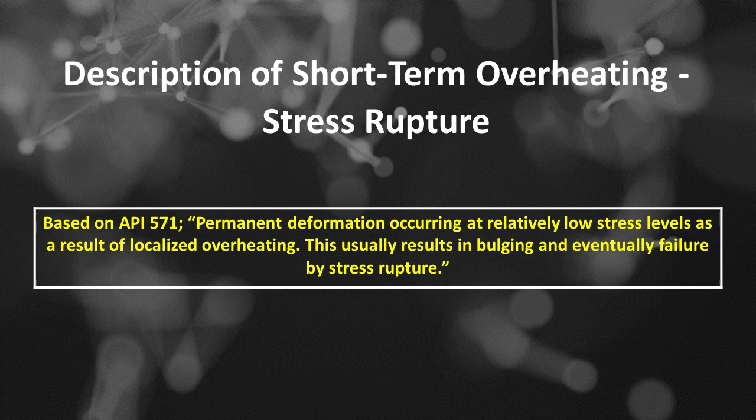Permanent deformation occurs at relatively low stress levels as a result of localized overheating. This usually results in bulging and eventually failure by stress rupture. Short-term overheating leading to stress rupture damage refers to the failure of materials, particularly metals and alloys, due to exposure to elevated temperatures for a relatively brief period while under stress. This phenomenon is particularly significant in applications involving high-temperature environments, such as power plants, chemical processing facilities, and aerospace components.

Characteristics of short-term overheating, stress rupture damage. Number 1 is mechanism. When materials are exposed to temperatures that exceed their design limits, microstructural changes occur. These may include grain growth, phase transformations, or the degradation of mechanical properties.

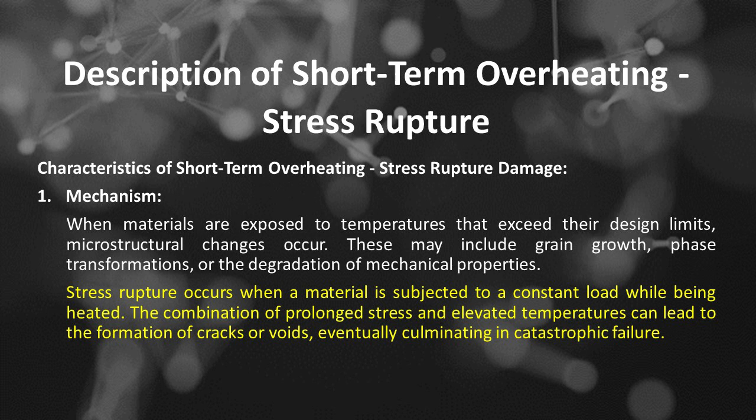Stress rupture occurs when a material is subjected to a constant load while being heated. The combination of prolonged stress and elevated temperatures can lead to the formation of cracks or voids, eventually culminating in catastrophic failure.

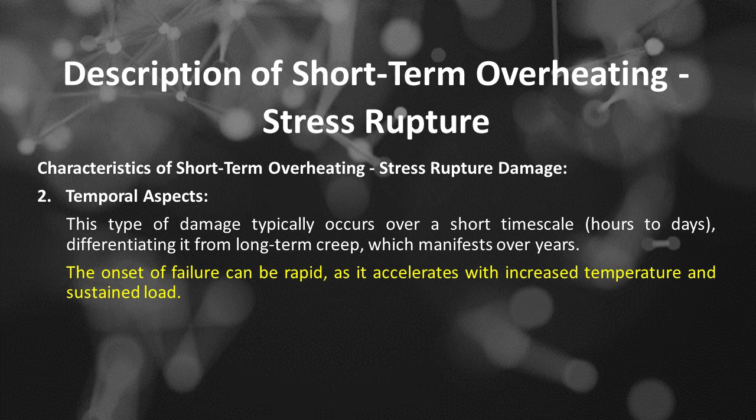Number 2 is temporal aspects. This type of damage typically occurs over a short timescale, hours to days, differentiating it from long-term creep, which manifests over years. The onset of failure can be rapid, as it accelerates with increased temperature and sustained load.

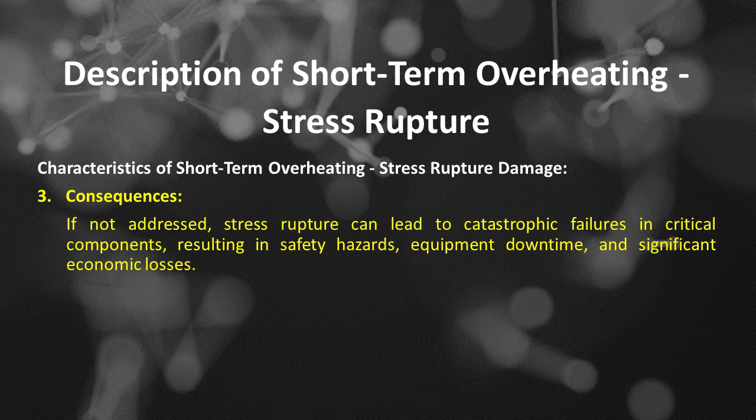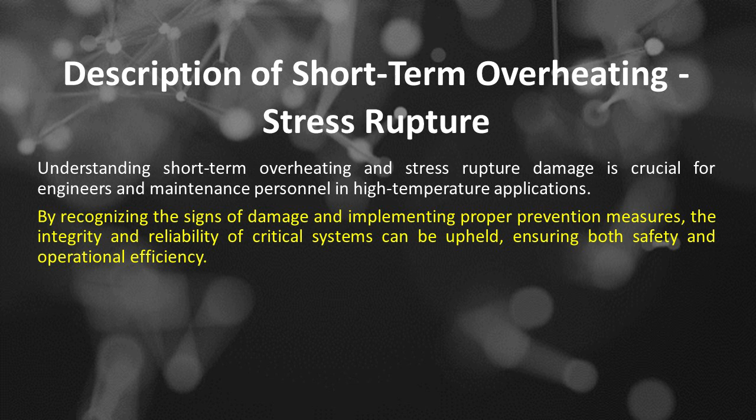Number 3 is consequences. If not addressed, stress rupture can lead to catastrophic failures in critical components, resulting in safety hazards, equipment downtime, and significant economic losses. Understanding short-term overheating and stress rupture damage is crucial for engineers and maintenance personnel in high-temperature applications. By recognizing the signs of damage and implementing proper prevention measures, the integrity and reliability of critical systems can be upheld, ensuring both safety and operational efficiency.

Short-term overheating, stress rupture damage mechanisms affected materials based on API 571. All fired heater tube materials and common materials of construction. Short-term overheating can lead to stress rupture damage, particularly in materials subjected to high temperatures and mechanical loads. This phenomenon is especially critical in high-temperature applications, such as power generation, aerospace, and petrochemical industries.

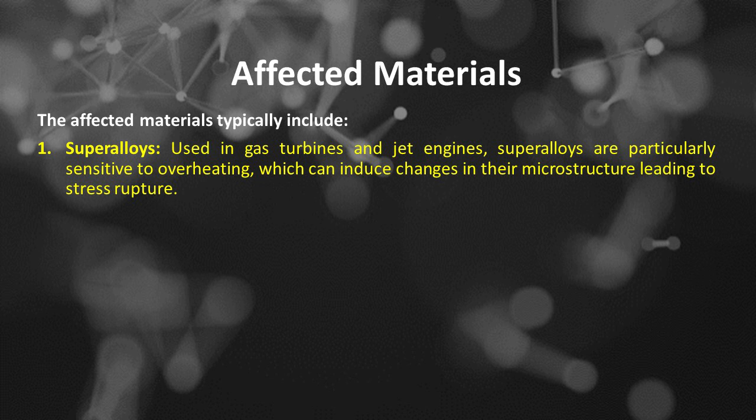The affected materials typically include: Number 1 is superalloys. Used in gas turbines and jet engines, superalloys are particularly sensitive to overheating, which can induce changes in their microstructure leading to stress rupture. Number 2 is steel alloys.

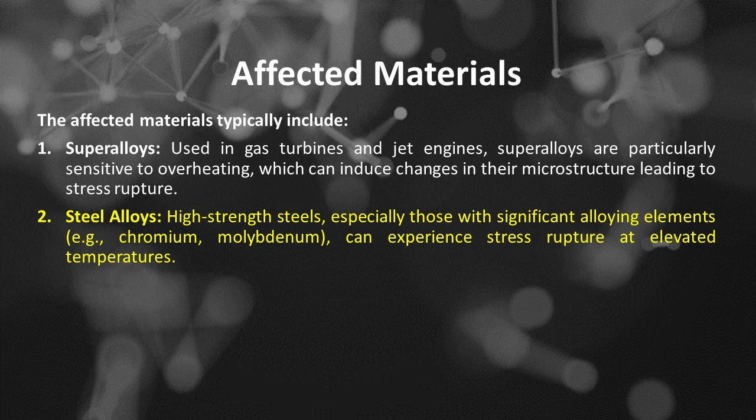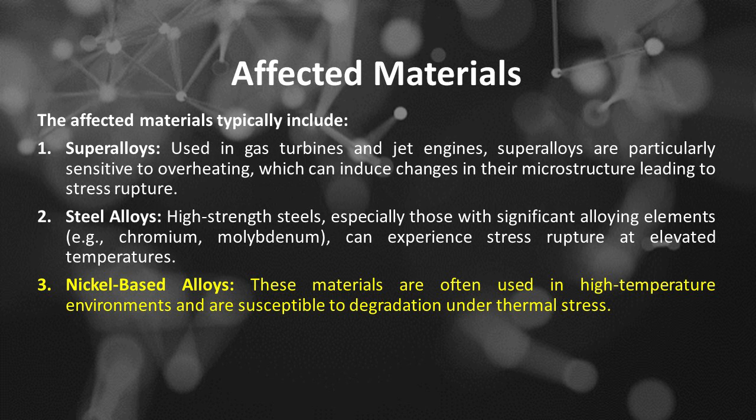High-strength steels, especially those with significant alloying elements, e.g., chromium, molybdenum, can experience stress rupture at elevated temperatures. Number 3 is nickel-based alloys. These materials are often used in high-temperature environments and are susceptible to degradation under thermal stress.

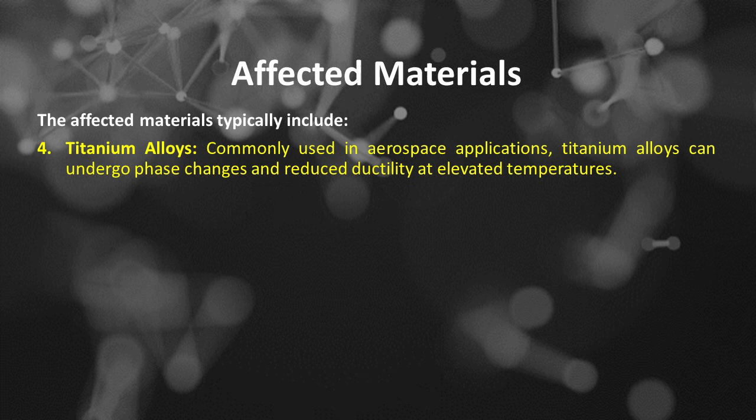Number 4 is titanium alloys. Commonly used in aerospace applications, titanium alloys can undergo phase changes and reduced ductility at elevated temperatures. Number 5 is ceramics. While ceramics may not rupture in the traditional sense, they can degrade or fail under thermal

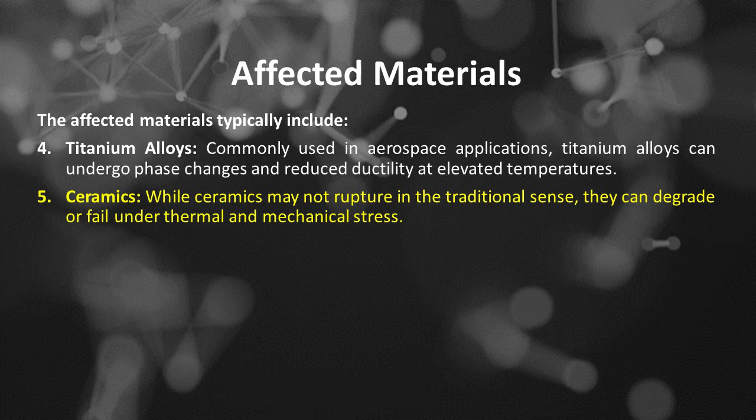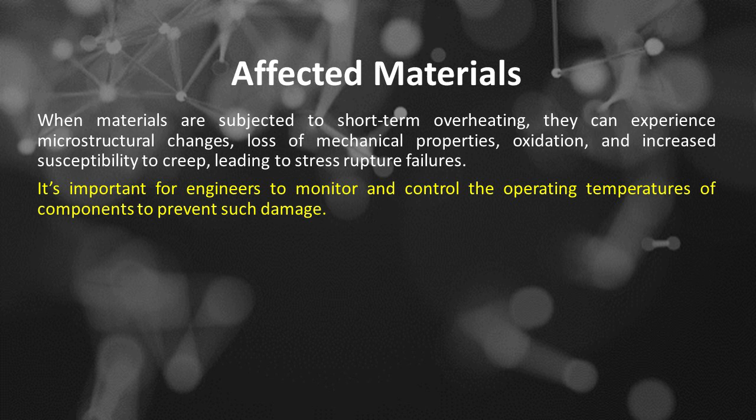and mechanical stress. Number 6 is composite materials. Polymer matrix composites, or PMCs, can be affected by overheating, leading to matrix degradation and interlaminar failure. When materials are subjected to short-term overheating, they can experience microstructural changes, loss of mechanical properties, oxidation, and increased susceptibility to creep, leading to stress rupture failures. It's important for engineers to monitor and control the operating temperatures of components to prevent such damage.

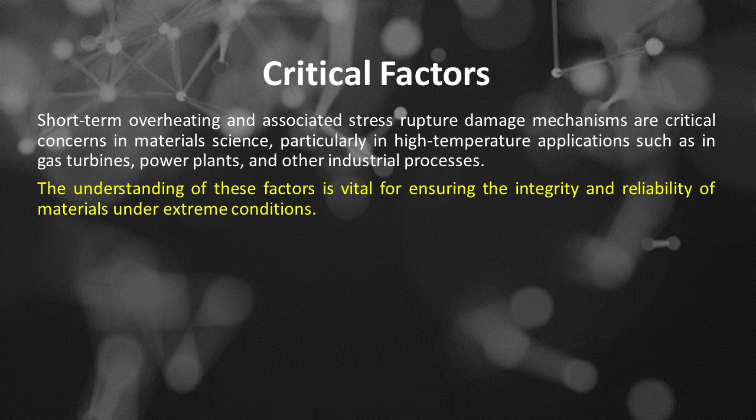Critical factors. Short-term overheating and associated stress rupture damage mechanisms are critical concerns in materials science, particularly in high-temperature applications such as in gas turbines, power plants, and other industrial processes. The understanding of these factors is vital for ensuring the integrity and reliability of materials under extreme conditions. Here are the critical factors influencing short-term overheating and stress rupture.

Number 1 is temperature exposure. High temperatures can significantly affect the mechanical properties of materials, leading to softening and decreased strength. Exceeding the material's design temperature can accelerate damage mechanisms. Number 2 is time at elevated temperature. The duration of exposure to elevated temperatures influences the extent of material degradation. Even short-term exposure can cause significant changes in microstructure and mechanical properties.

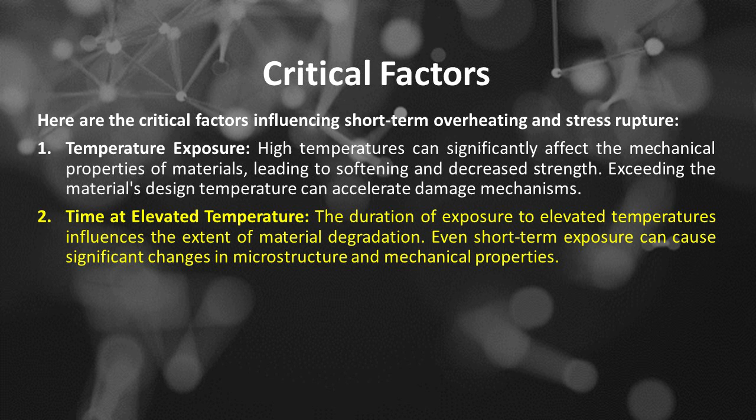Number 3 is material composition. The specific alloying elements and phase structures in a material influence its resistance to overheating and stress rupture. Materials with higher creep resistance, such as certain nickel-based superalloys, perform better under severe conditions.

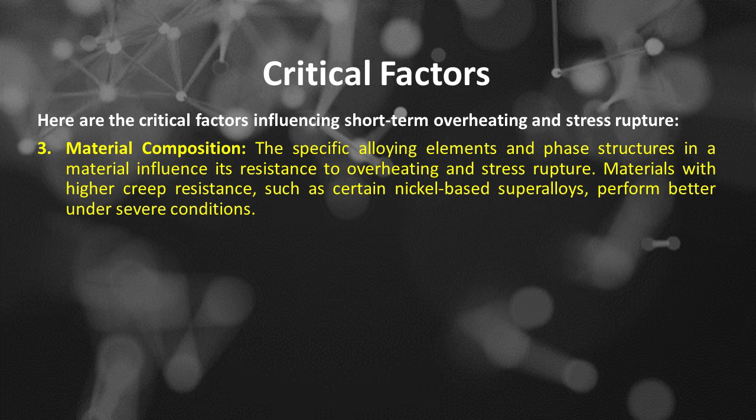The first of material composition is creep resistance. Materials exhibiting good creep resistance will generally perform better under high temperature and stress conditions. Understanding the material's creep behavior is crucial in assessing its susceptibility to stress rupture.

The second of material composition is alloy composition. The specific alloying elements and their concentrations can affect the material's resistance to thermal fatigue and stress rupture. Elements that promote solid solution strengthening or cohesive strength at high temperatures can enhance performance.

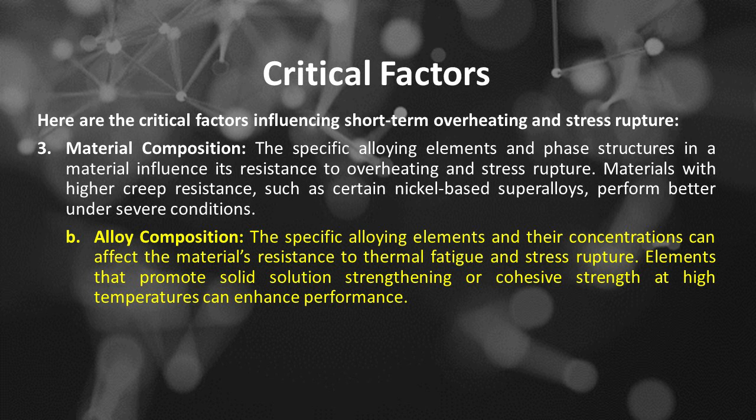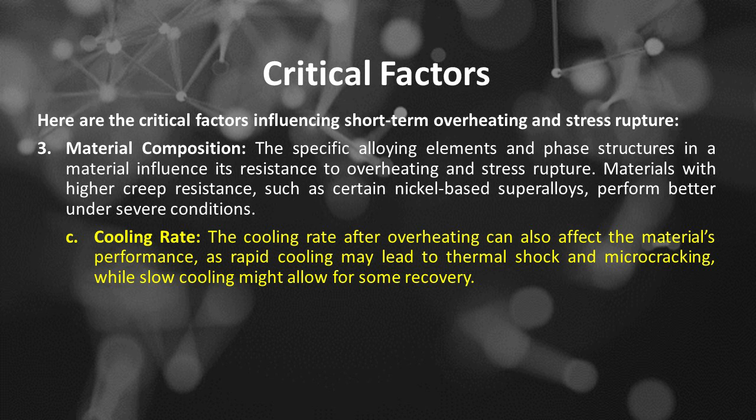The third is cooling rate. The cooling rate after overheating can also affect the material's performance, as rapid cooling may lead to thermal shock and microcracking, while slow cooling might allow for some recovery.

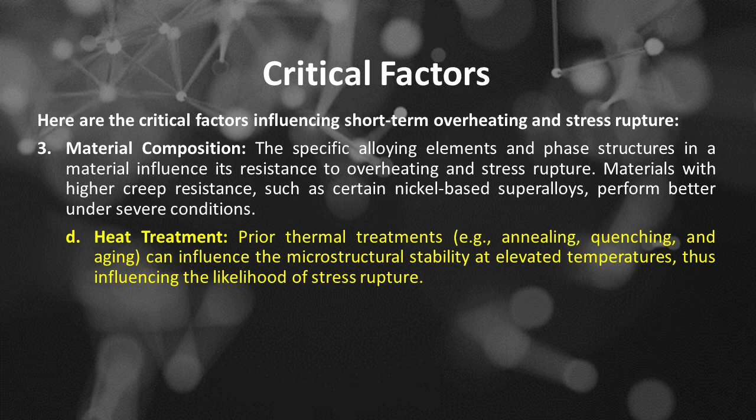The fourth is heat treatment. Prior thermal treatments, e.g., annealing, quenching, and aging, can influence the microstructural stability at elevated temperatures, thus influencing the likelihood of stress rupture.

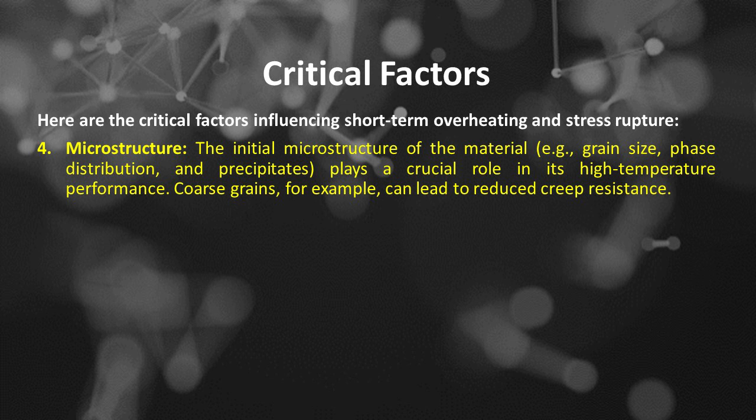Number 4 is microstructure. The initial microstructure of the material, such as grain size, phase distribution, and precipitates, plays a crucial role in its high-temperature performance. Coarse grains, for example, can lead to reduced creep resistance.

Number 5 is stress state. The applied load and type of stress, tensile, compressive, shear, can affect the rupture behavior. High tensile stresses can exacerbate the effects of thermal damage.

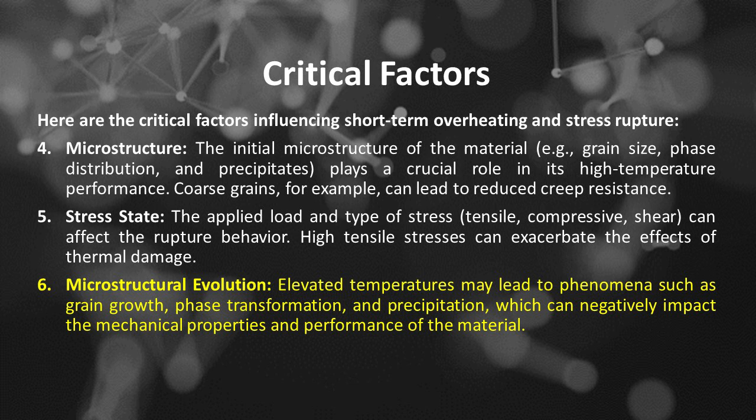Number 6 is microstructural evolution. Elevated temperatures may lead to phenomena such as grain growth, phase transformation, and precipitation, which can negatively impact the mechanical properties and performance of the material.

Number 7 is oxidation and corrosion. At high temperatures, materials are more susceptible to oxidation and other forms of deterioration, which can further degrade material properties and lead to premature failure.

Number 8 is prior service history. The material's previous exposure to stress and temperature cycles can affect its current behavior under overheating conditions, including the development of residual stresses or damage.

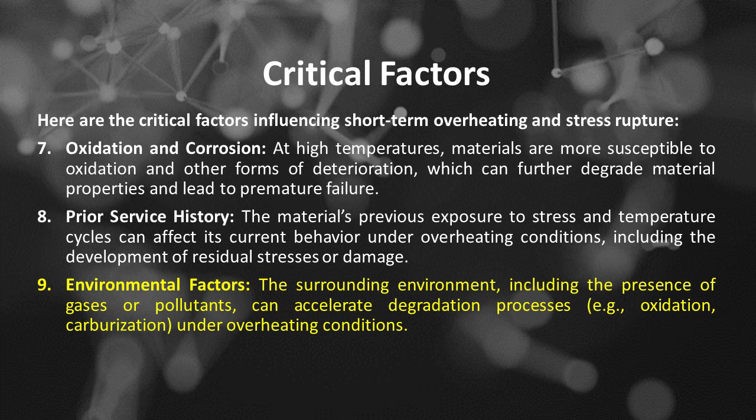Number 9 is environmental factors. The surrounding environment, including the presence of gases or pollutants, can accelerate degradation processes, e.g., oxidation, carburization, under overheating conditions.

Number 10 is load history. The history of loading, including any previous cycles of loading and unloading, can introduce residual stresses which may promote stress rupture under thermal conditions. Number 11 is fatigue.

Previous fatigue damage can lead to the formation of microcracks that are more prone to grow under conditions of short-term overheating and sustained stress. Number 12 is presence of voids or defects.

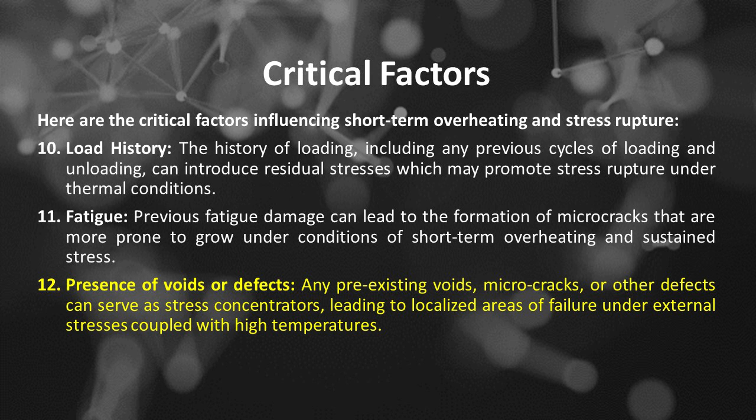Any pre-existing voids, microcracks, or other defects can serve as stress concentrators, leading to localized areas of failure under external stresses coupled with high temperatures.

In summary, short-term overheating and stress rupture mechanisms are influenced by a combination of thermal, mechanical, material, and environmental factors. Understanding these critical elements is necessary for predicting material behavior and designing components that can withstand high-temperature operations safely.

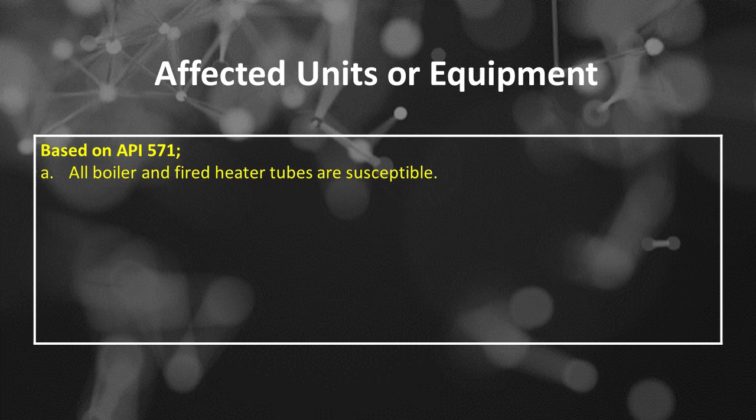Affected units or equipment based on API 571. The first is all boiler and fired heater tubes are susceptible.

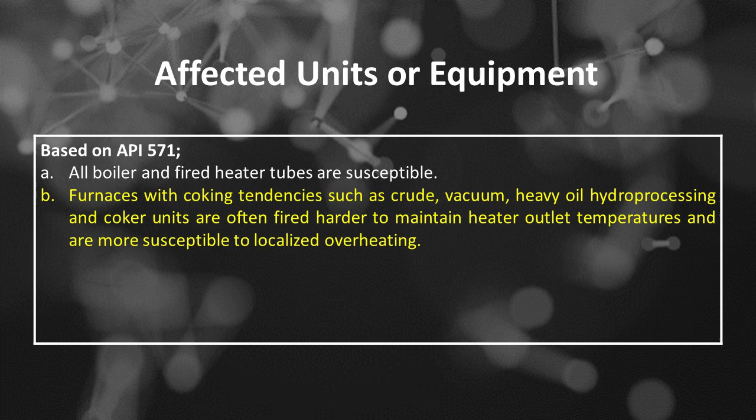The second is furnaces with coking tendencies such as crude, vacuum, heavy oil hydroprocessing and coker units are often fired harder to maintain heater outlet temperatures and are more susceptible to localized overheating.

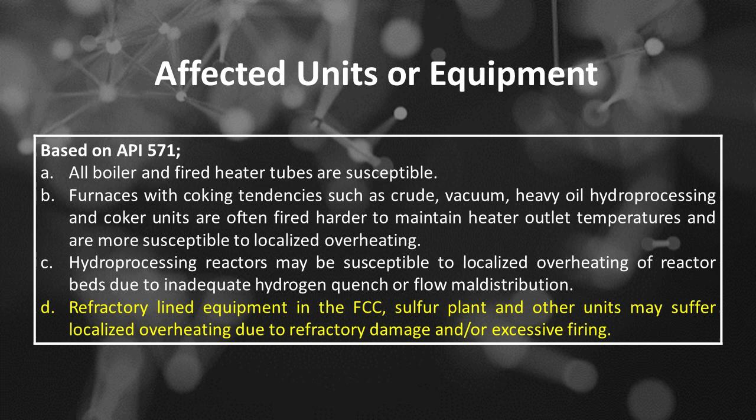The third is hydroprocessing reactors may be susceptible to localized overheating of reactor beds due to inadequate hydrogen quench or flow maldistribution. The fourth is refractory lined equipment in the FCC, sulfur plant and other units may suffer localized overheating due to refractory damage and/or excessive firing.

Short-term overheating, stress rupture is a damage mechanism that occurs when a material is subjected to high temperatures and stresses, causing the material to rupture. The affected units or equipment of this damage mechanism are typically those that are exposed to high-temperature environments, such as...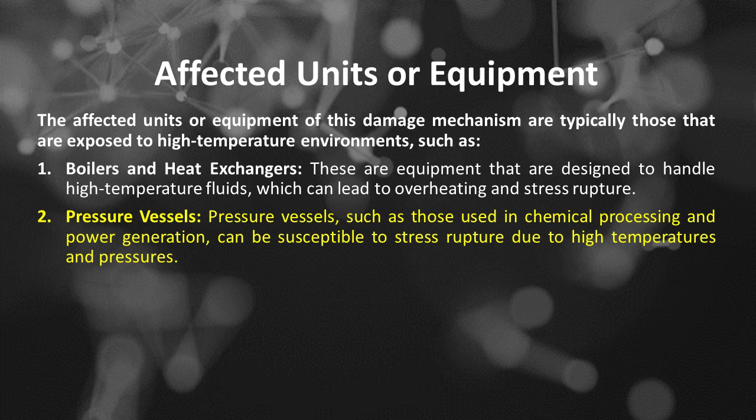Number 2 is pressure vessels. Pressure vessels, such as those used in chemical processing and power generation, can be susceptible to stress rupture due to high temperatures and pressures. Number 3 is piping systems.

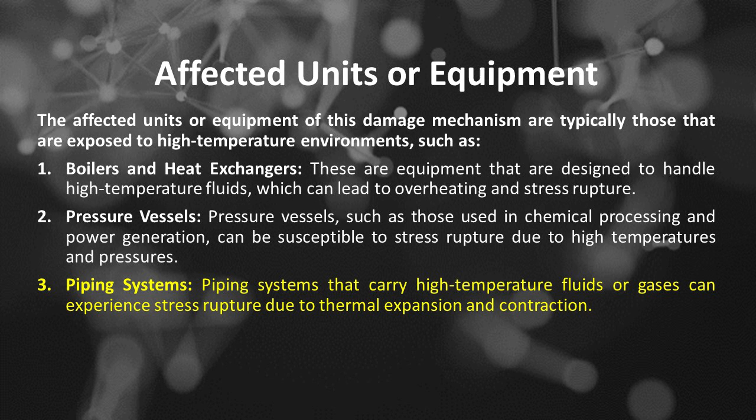Piping systems that carry high-temperature fluids or gases can experience stress rupture due to thermal expansion and contraction. Number 4 is turbines and generators. These machines are designed to operate at high temperatures and can be prone to stress rupture if not properly maintained...

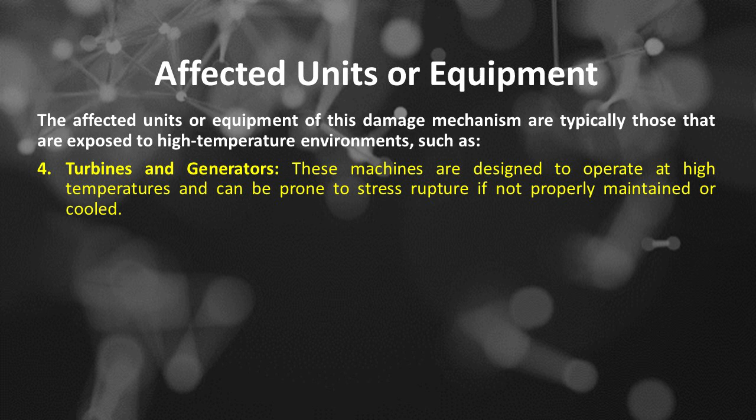or cooled. Number 5 is heat transfer equipment. Equipment such as heat exchangers, condensers, and evaporators can experience stress rupture due to high temperatures and pressure differentials.

Number 6 is cooling systems. Cooling systems, such as cooling towers and heat exchangers, can experience stress rupture if not properly designed or maintained.

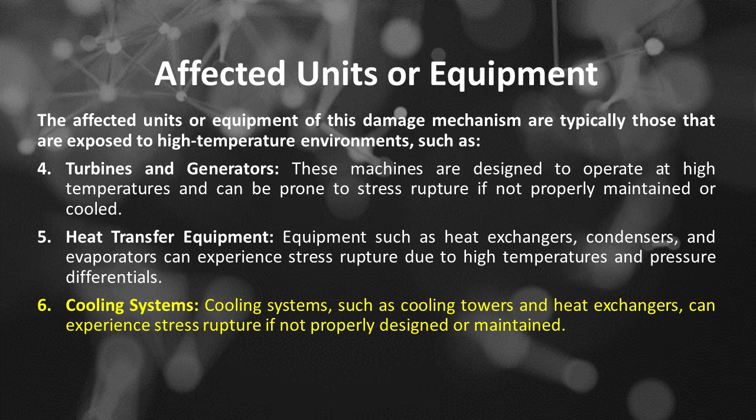Number 7 is refrigeration equipment. Refrigeration equipment, such as compressors and condensers, can experience stress rupture due to high pressures and temperatures.

In general, any equipment or system that is exposed to high temperatures, pressures, or stresses can be susceptible to short-term overheating, stress rupture damage. Appearance or morphology of damage based on API 571.

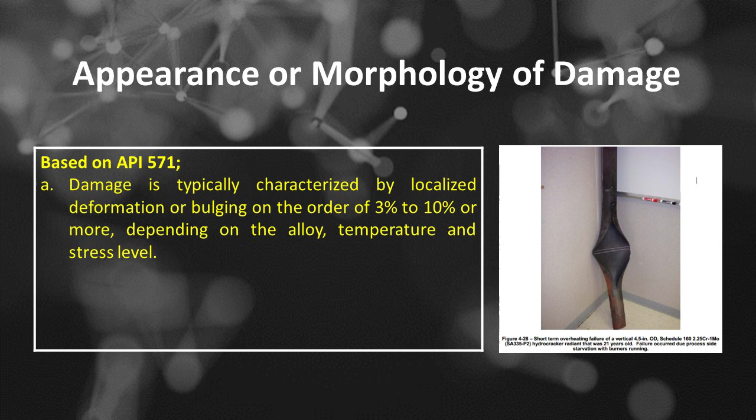The first is damage is typically characterized by localized deformation or bulging on the order of 3% to 10% or more, depending on the alloy, temperature and stress level.

The second is ruptures are characterized by open fish mouth failures and are usually accompanied by thinning at the fracture surface, see Figure 4-28 to 4-30.

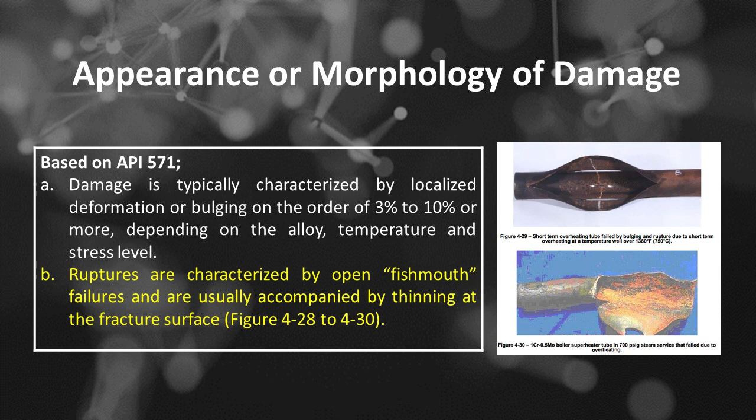The appearance or morphology of damage due to short-term overheating and stress rupture in materials, especially in metals and alloys, is characterized by several distinct features.

Here are the key aspects of the appearance associated with this damage mechanism. Number 1 is cracking. One of the most prominent features is the formation of cracks. These can appear as brittle fractures, often with a characteristic intergranular or transgranular appearance, depending on the material and conditions. The cracks typically initiate at regions of high stress concentration or microstructural defects.

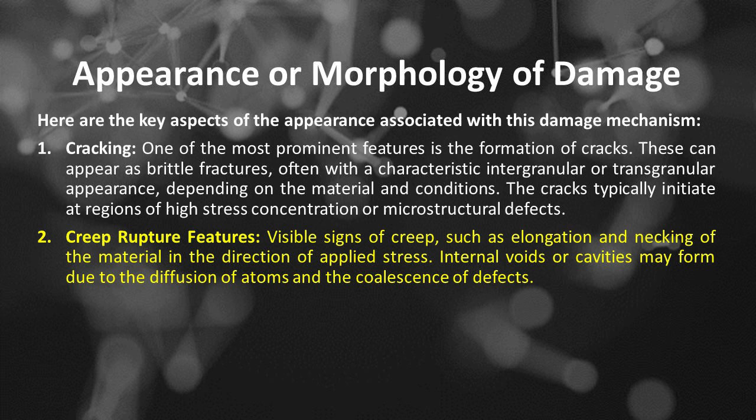Number 2 is creep rupture features. Visible signs of creep, such as elongation and necking of the material in the direction of applied stress. Internal voids or cavities may form due to the diffusion of atoms and the coalescence of defects.

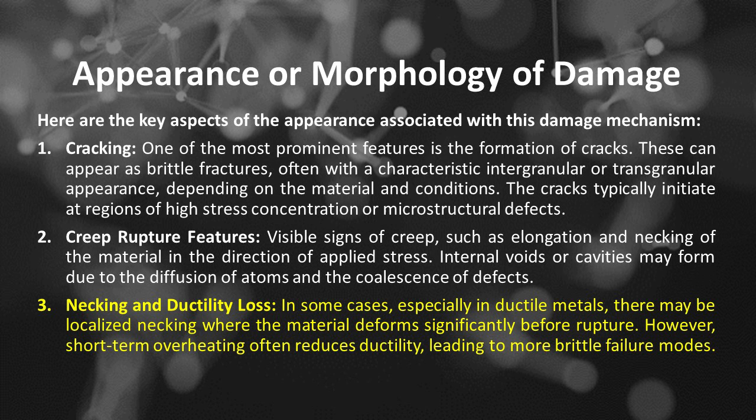Number 3 is necking and ductility loss. In some cases, especially in ductile metals, there may be localized necking where the material deforms significantly before rupture. However, short-term overheating often reduces ductility, leading to more brittle failure modes.

Number 4 is discoloration. Overheating can lead to changes in color on the surface of the material due to oxidation or changes in microstructure. This can include blue or golden hues due to heat tint.

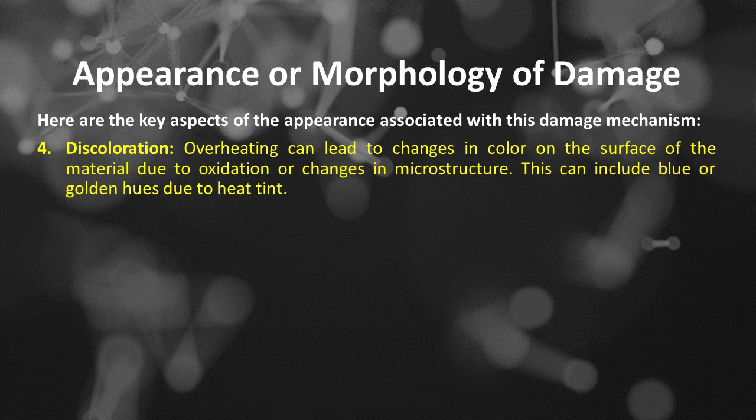Number 5 is grain growth and coarsening. Excessive heat can cause grain growth, which can be visible as larger grains in the microstructure when examined under a microscope. This can reduce the material strength and alter its mechanical properties.

Number 6 is oxide layers or scale formation. On the surface, there may be the formation of oxide layers due to prolonged exposure to elevated temperatures. These scales may vary in thickness and composition, affecting the material's fatigue life and corrosion resistance.

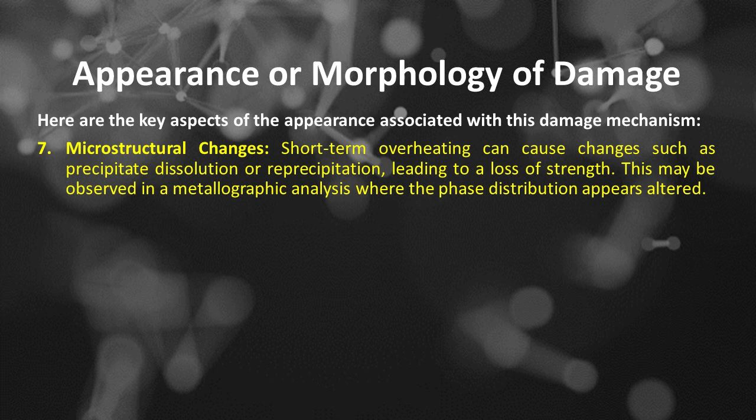Number 7 is microstructural changes. Short-term overheating can cause changes such as precipitate dissolution or reprecipitation, leading to a loss of strength. This may be observed in a metallographic analysis where the phase distribution appears altered. Number 8 is intergranular damage.

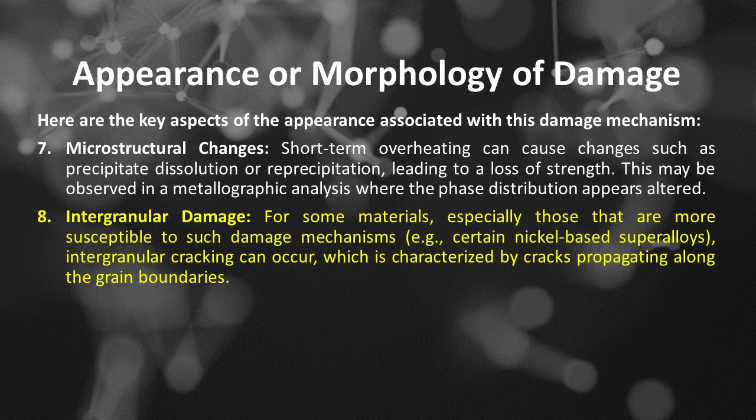For some materials, especially those that are more susceptible to such damage mechanisms, e.g., certain nickel-based superalloys, intergranular cracking can occur, which is characterized by cracks propagating along the grain boundaries.

Number 9 is fracture surface. The fracture surface may display features typical of stress rupture, including a fibrous appearance or a more brittle, granular texture depending on the loading conditions and material properties.

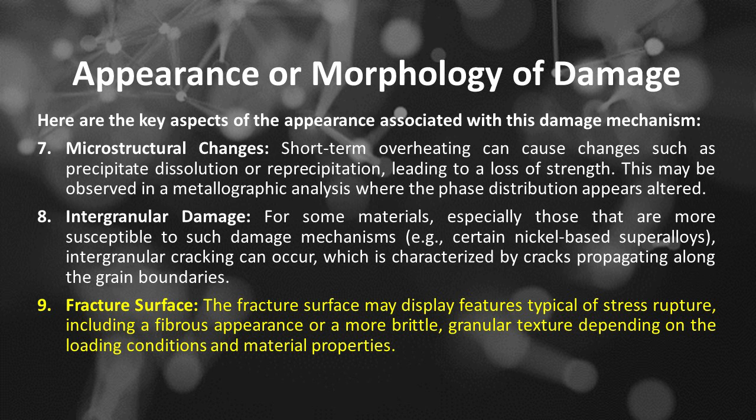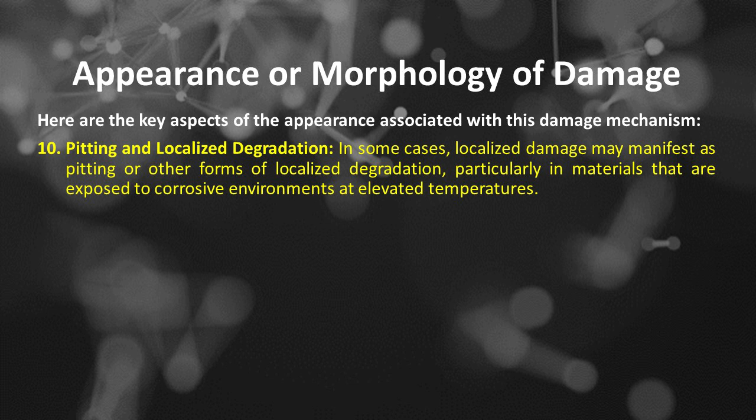Number 10 is pitting and localized degradation. In some cases, localized damage may manifest as pitting or other forms of localized degradation, particularly in materials that are exposed to corrosive environments at elevated temperatures.

Understanding these morphological changes is essential for diagnosing and assessing the integrity of materials subjected to thermal and mechanical stresses, especially in high-temperature applications such as turbines, pressure vessels, and other critical infrastructure.

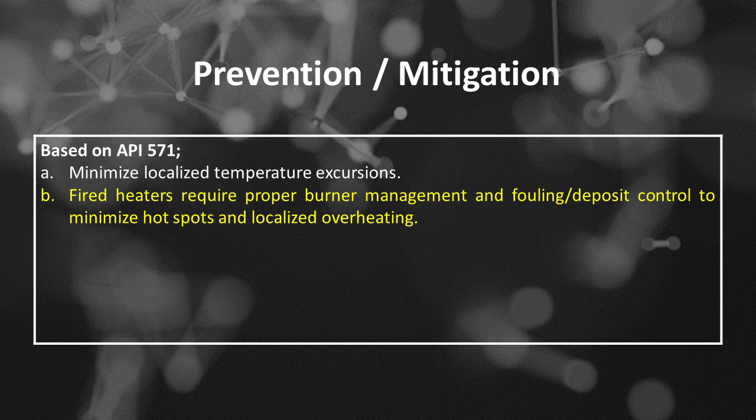Prevention and mitigation based on API 571. The first is minimize localized temperature excursions. The second is fired heaters require proper burner management and fouling/deposit control to minimize hot spots and localized overheating. The third is utilize burners which produce a more diffuse flame pattern.

The fourth is in hydroprocessing equipment, install and maintain bed thermocouples in reactors and minimize the likelihood of hot spots through proper design and operation. The fifth is maintain refractory in serviceable condition in refractory-lined equipment.

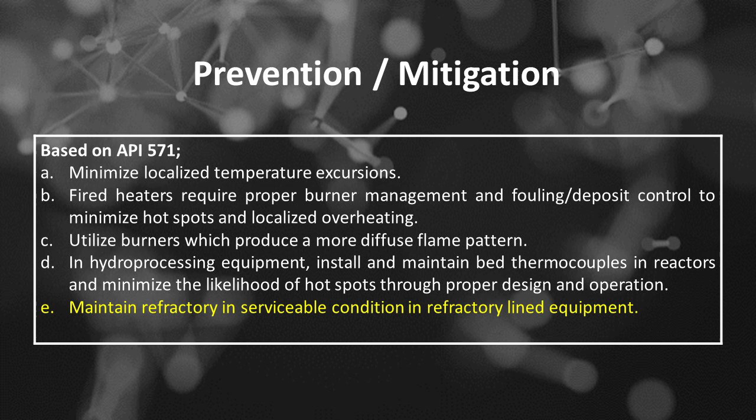Short-term overheating and subsequent stress rupture damage in materials, particularly in high-temperature applications, can lead to significant failures in engineering components. To prevent or mitigate these issues, several strategies can be employed.

Number 1 is material selection. The first of material selection to be considered is use of high-temperature materials. Select materials that have high-temperature resistance and good creep properties for applications that operate in elevated temperatures.

The second of material selection to be considered is alloying. Consider using alloys that are designed to withstand higher temperatures and resist oxidation and corrosion, specifically designed for high-temperature environments, such as nickel-based superalloys, can be more resilient.

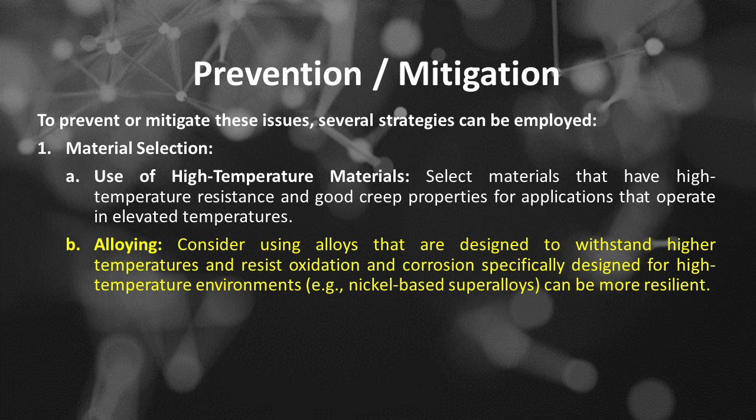Number 2 is design considerations. The first of design considerations to be considered is design for thermal loads. Ensure that the design can accommodate thermal expansion and contraction. This includes proper supports and clearances.

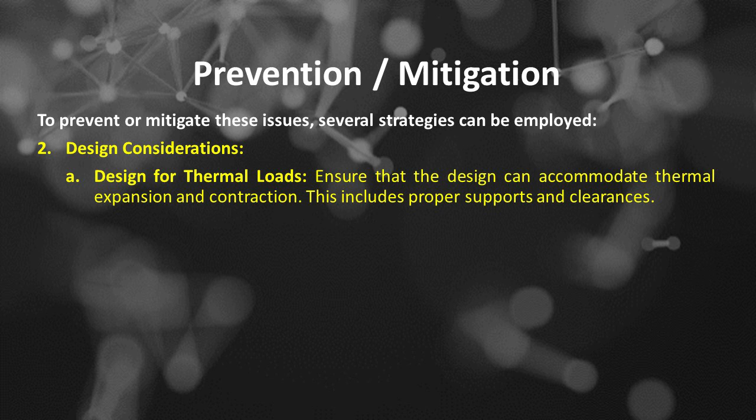The second of design considerations to be considered is stress distribution. Design components to minimize stress concentrations which can exacerbate damage from overheating.

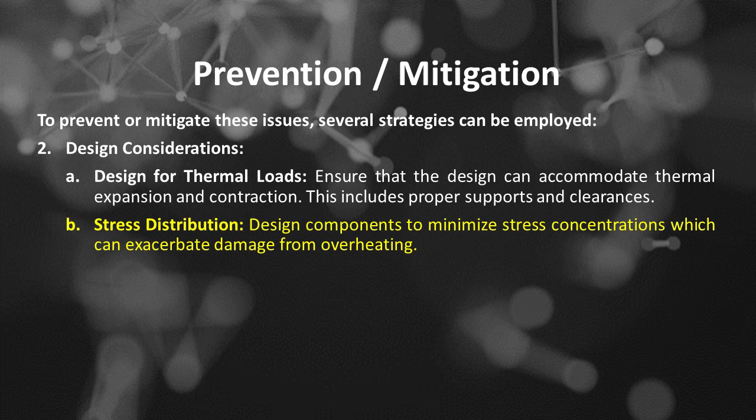Number 3 is thermal management. The first of thermal management to be considered is control operating temperatures through active cooling systems, heat sinks, or insulation to prevent overheating. Insulation: use proper thermal insulation to prevent heat loss and ensure that components do not inadvertently overheat due to external heat sources.

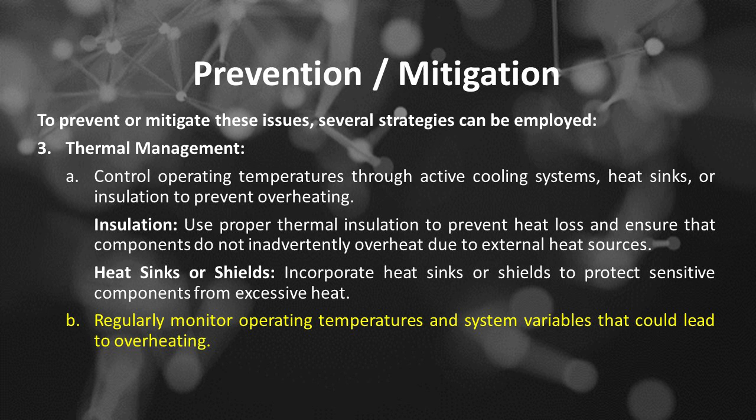Heat sinks or shields: incorporate heat sinks or shields to protect sensitive components from excessive heat. The second of thermal management to be considered is regularly monitor operating temperatures and system variables that could lead to overheating. Number 4 is loading conditions.

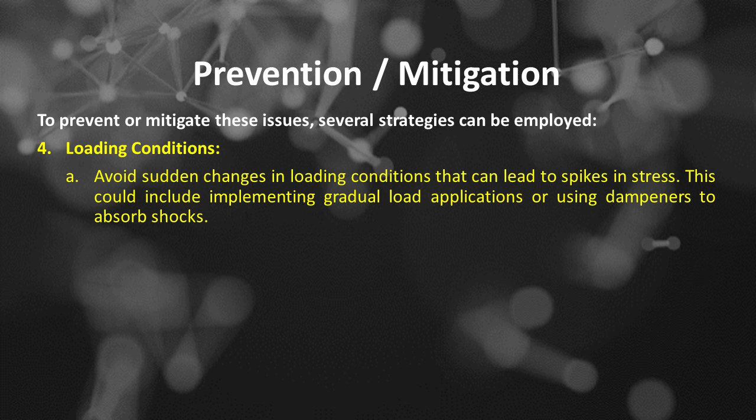Avoid sudden changes in loading conditions that can lead to spikes in stress. This could include implementing gradual load applications or using dampeners to absorb shocks. Number 5 is inspection and maintenance.

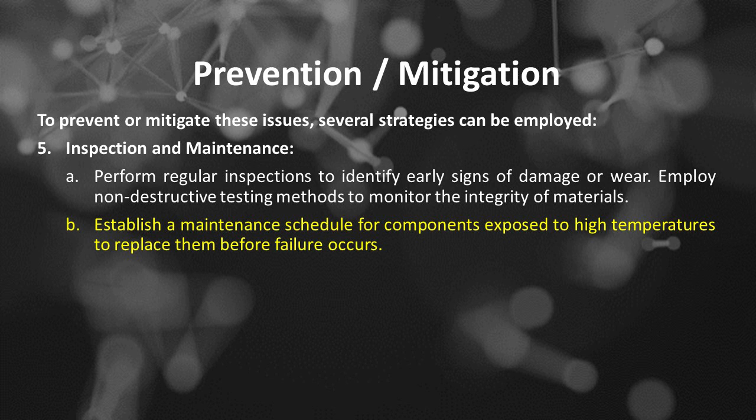The first is to perform regular inspections to identify early signs of damage or wear, and employ non-destructive testing methods to monitor the integrity of materials. The second is to establish a maintenance schedule for components exposed to high temperatures, to replace them before failure occurs.

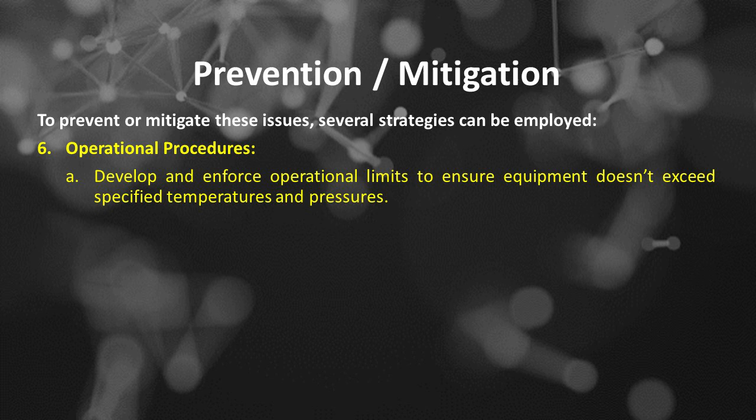Number 6 is operational procedures. The first is to develop and enforce operational limits to ensure equipment doesn't exceed specified temperatures and pressures. The second is to train operators to recognize conditions that lead to overheating and how to respond effectively.

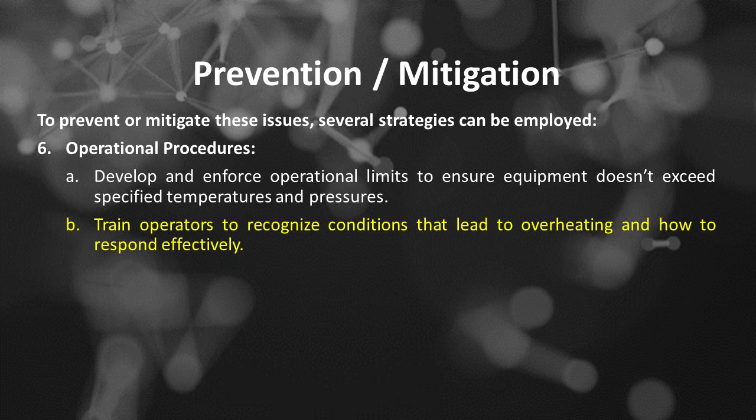Number 7 is protective coatings. Use thermal barrier coatings or oxidation-resistant coatings that can help protect the underlying material from high temperatures.

Number 8 is stress relief techniques. Utilize stress relief heat treatments, if applicable, to reduce residual stresses in components before they are placed in service. The following stress relief treatments are commonly implemented.

The first is post-weld heat treatment. If welding is involved, apply post-weld heat treatment that can relieve stress and reduce the risk of rupture. The second is annealing. For materials that may have been subjected to high-stress conditions, an annealing process may help relieve internal stresses. Number 9 is redundancy.

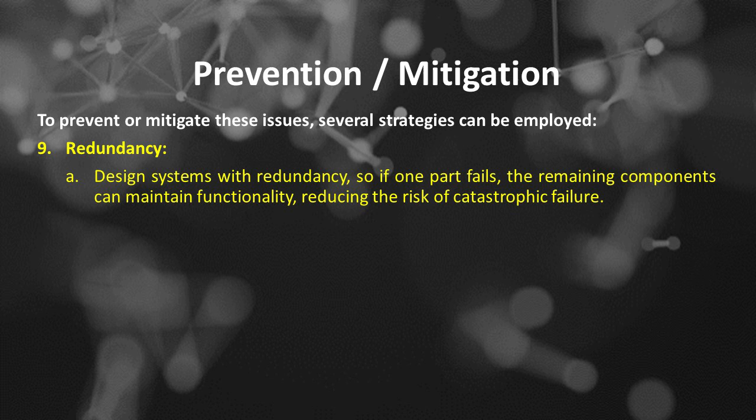Design systems with redundancy, so if one part fails, the remaining components can maintain functionality, reducing the risk of catastrophic failure. Implementing these strategies can help in reducing the risks associated with short-term overheating and stress rupture damage, thereby enhancing the durability and reliability of components in high-temperature applications.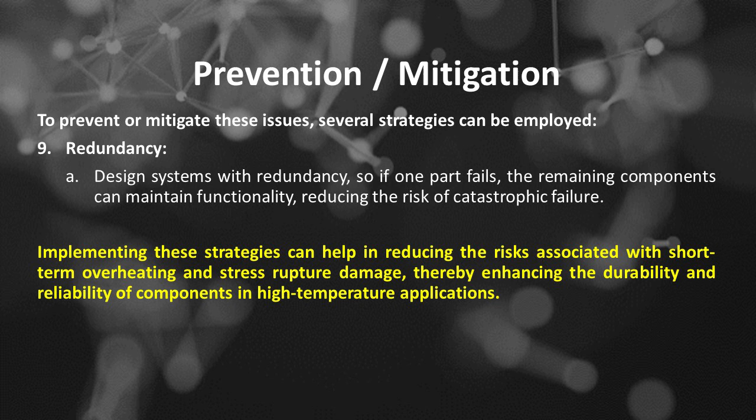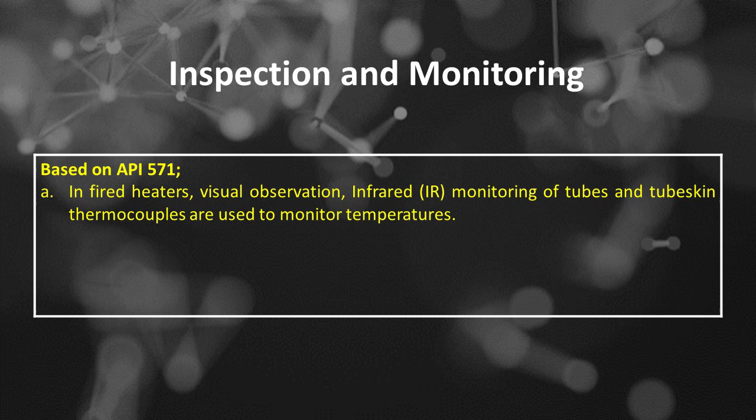Inspection and monitoring based on API 571. In fired heaters, visual observation, infrared (IR) monitoring of tubes, and tube skin thermocouples are used to monitor temperatures. The second is refractory-lined equipment can be monitored with heat-indicating paint and periodic infrared (IR) scans.

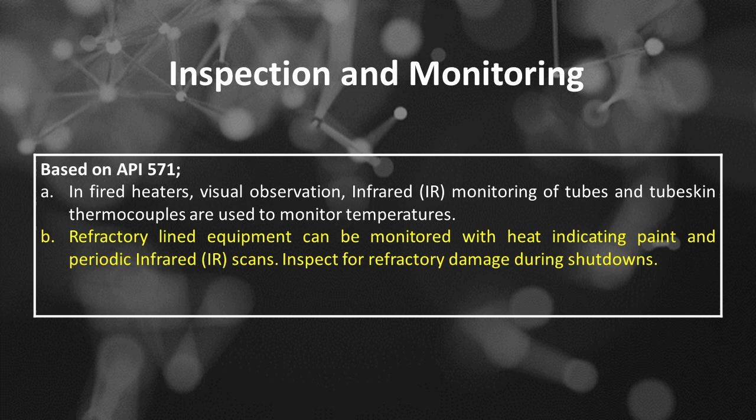Inspect for refractory damage during shutdowns. The third is maintain and monitor reactor bed thermocouples as well as reactor skin thermocouples.

Short-term overheating and stress rupture damage in materials, especially in high-temperature applications like gas turbines or power plants, can lead to significant failures. Inspecting and monitoring for these types of damage is essential for maintaining structural integrity and operational safety. Here are some common inspection and monitoring methods used to detect these conditions.

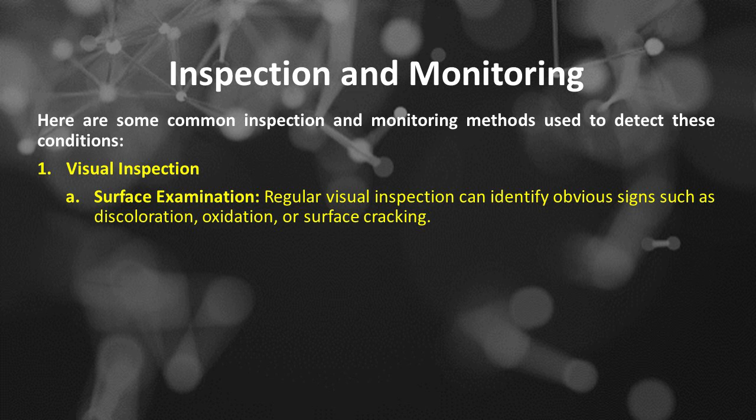Number 1 is visual inspection. The first is surface examination. Regular visual inspection can identify obvious signs such as discoloration, oxidation, or surface cracking. The second is infrared thermography. This non-destructive technique uses thermal imaging cameras to detect temperature anomalies indicative of overheating.

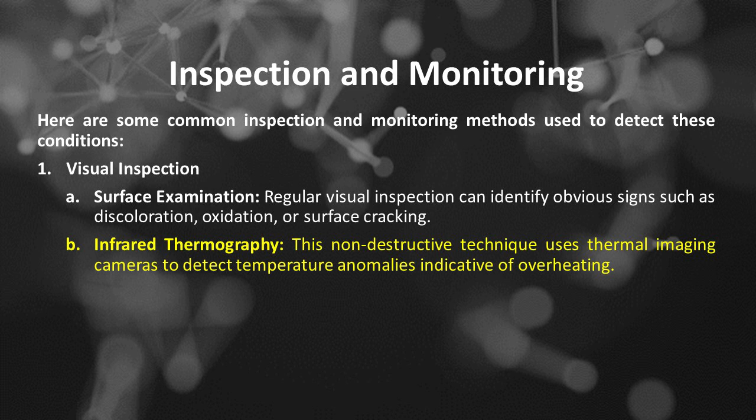Number 2 is non-destructive testing (NDT) techniques. The first is ultrasonic testing, or UT, which utilizes high-frequency sound waves to detect internal flaws such as cracks or voids that may have developed due to overheating.

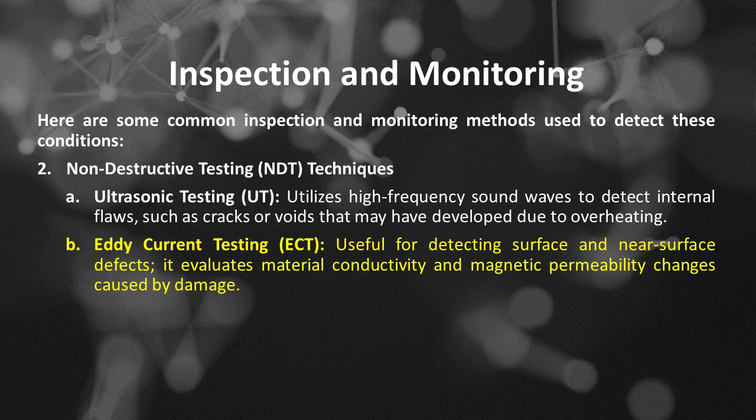The second is eddy current testing, or ECT, useful for detecting surface and near-surface defects; it evaluates material conductivity and magnetic permeability changes caused by damage. The third is magnetic particle testing, or MPT, effective for identifying surface and near-surface discontinuities in ferromagnetic materials.

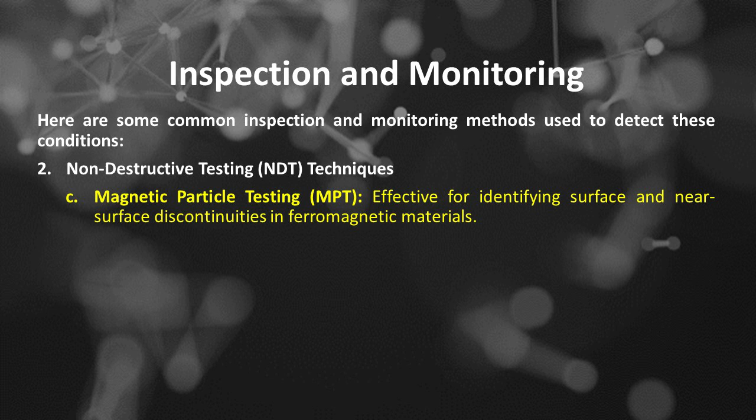The fourth is dye penetrant testing, or PT, which reveals surface cracks by applying a penetrant dye and detecting where it seeps out from defects.

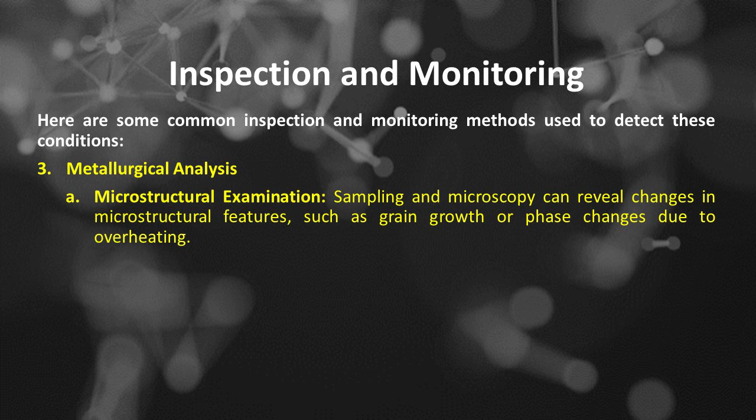Number 3 is metallurgical analysis. The first is microstructural examination: sampling and microscopy can reveal changes in microstructural features, such as grain growth or phase changes due to overheating. The second is fractography; analyzing fracture surfaces can help determine the failure mode and the presence of stress rupture damage.

Number 4 is mechanical property testing. The first is tensile testing: evaluating material properties can identify reductions in strength or ductility indicative of damage due to overheating. The second is hardness testing; changes in hardness can reflect material degradation and the presence of stress rupture.

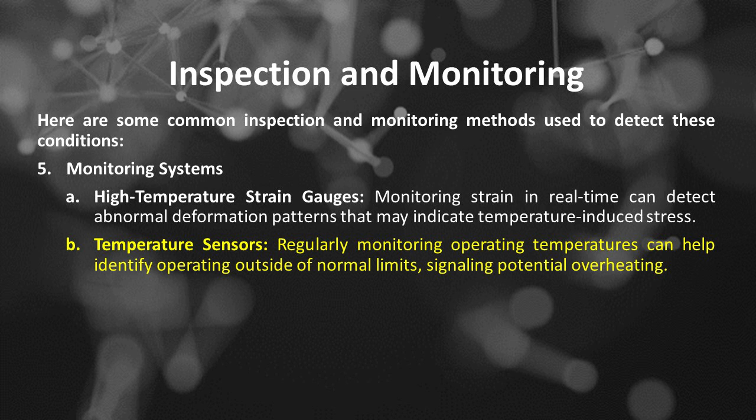Number 5 is monitoring systems. High-temperature strain gauges: monitoring strain in real time can detect abnormal deformation patterns that may indicate temperature-induced stress. The second is temperature sensors; regularly monitoring operating temperatures can help identify operation outside of normal limits, signaling potential overheating.

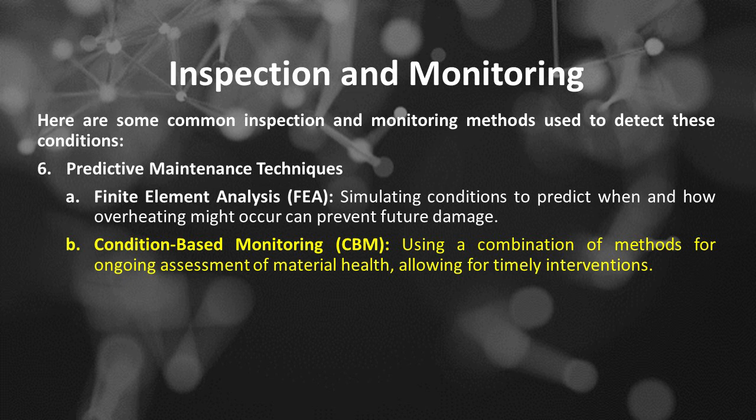Number 6 is predictive maintenance techniques. The first is finite element analysis (FEA): simulating conditions to predict when and how overheating might occur can prevent future damage. The second is condition-based monitoring (CBM), using a combination of methods for ongoing assessment of material health, allowing for timely interventions.

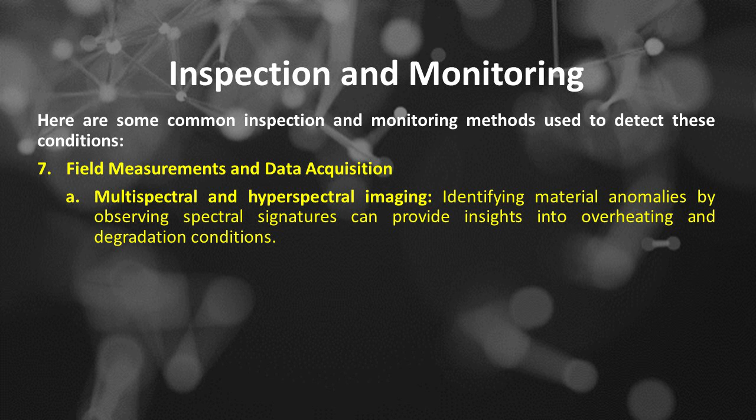Number 7 is field measurements and data acquisition. The first is multispectral and hyperspectral imaging, identifying material anomalies by observing spectral signatures to provide insights into overheating and degradation conditions. The second is acoustic emission monitoring, detecting high-frequency sound waves emitted by the growth of cracks or degradation processes.

In conclusion, the selection of inspection and monitoring methods will depend on the specific material, operating conditions, and criticality of the component in question. Regular monitoring and a combination of these techniques can provide a comprehensive approach to detecting short-term overheating and its related stress rupture damage.